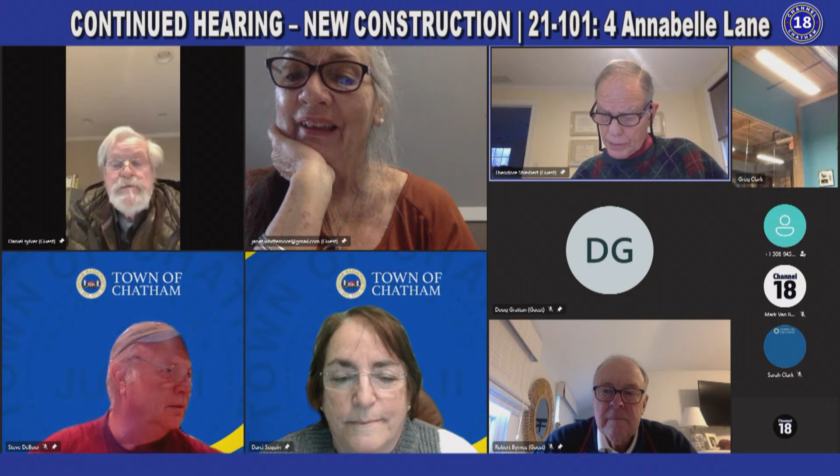So what has transpired since our last meeting? Wait a minute, let me just see the agenda. Continued hearing, new construction, 21-101, Chatham Productions LLC, care of Victoria Clark. Application to construct a new dwelling located at Lot 4, Annabelle Lane.

All righty, okay, go right ahead. So obviously this is a continuation of the Lot 4 application for new construction. The presentation we submitted, which I believe you all have copies of after the walkthrough yesterday that we handed out, specifically started to focus on the mass scale, et cetera, of the immediate surroundings, unlike previous meetings where we focused on other subdivisions that are in the HBDC as well as general business. So this packet specifically pointed out the footprint to lot size ratio of a lot of the buildings in the immediate surroundings.

Something we wanted to point out was that the average footprint to lot size ratio for all the ones we included is about 22%, versus what we're proposing on lot 4, which is a little less than 14%, because the lot size is 15,480 square feet and the footprint of the building is 2,104 square feet. So 22 versus 14 is a substantial difference.

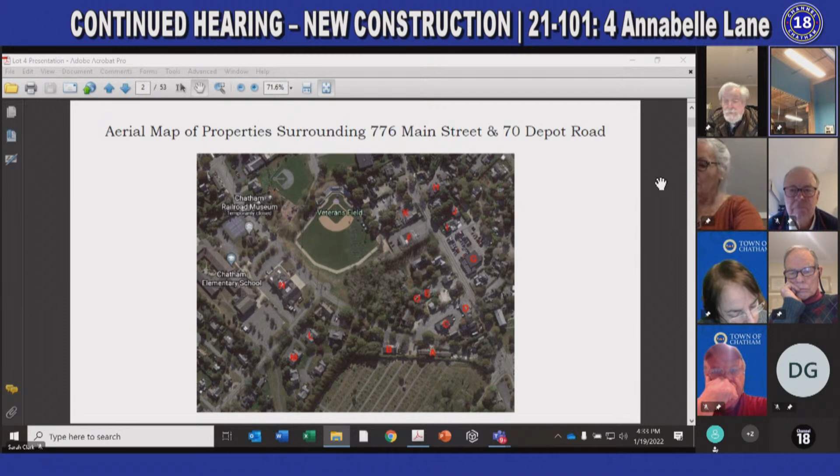One thing we also wanted to point out is that, although it hasn't gone through planning for building permit approval yet, 784 Main Street, which was voted on and approved by the HBDC, I believe 4-1, has a footprint to lot size ratio of a little under 18%, give or take. That property has a building footprint of over 3,000 square feet.

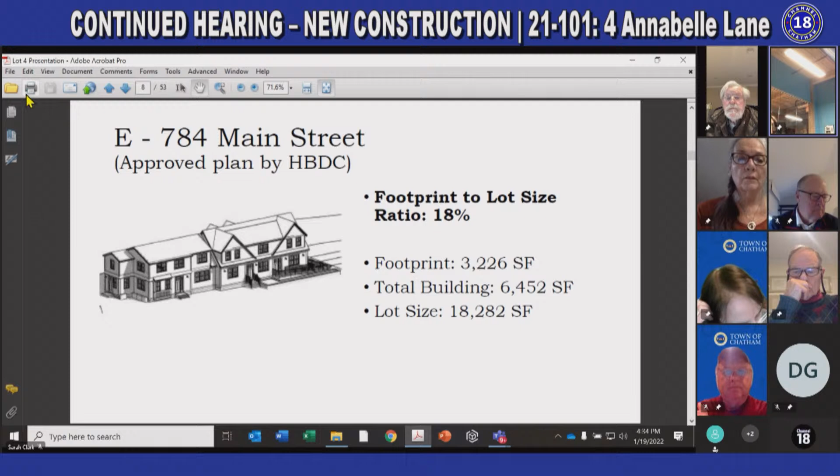Another thing regarding lot 4, we realized today, after our walkthrough yesterday, that the second floor on the plans we provided last meeting is actually smaller than shown, about 150 square feet smaller. So instead of being a 3,990 square foot house, it's actually about 3,800 square feet, give or take, which is a difference of about 150 square feet that we wanted to point out.

Additionally, regarding the conversation we had yesterday about the turnaround for the parking, to our understanding of the zoning bylaw guidelines, you're required to have 2 parking spaces for a residential dwelling unit, so I do not believe the parking turnaround is a requirement.

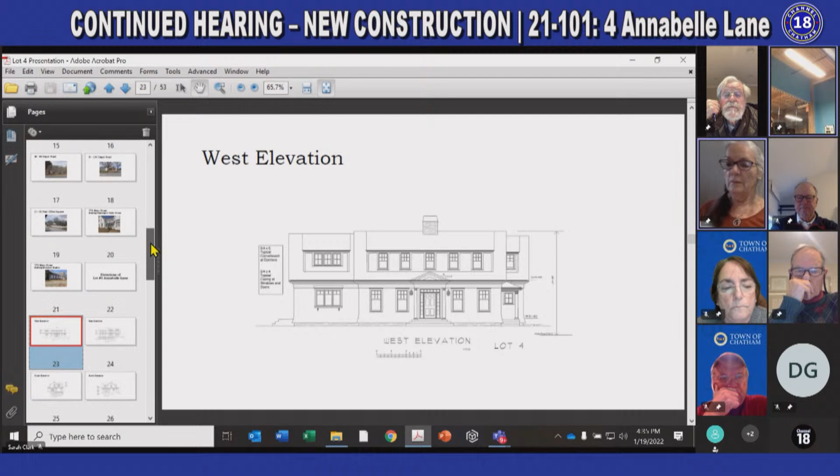We also looked at possibly adjusting it so that instead of going right up close to the property line, we'd make it shorter, not a full parking space but just a few feet of turnaround space, or putting it more along the side of the garage so it's further from the property line but still provides space to turn around. That's something we wanted to note based on our conversation at the walkthrough.

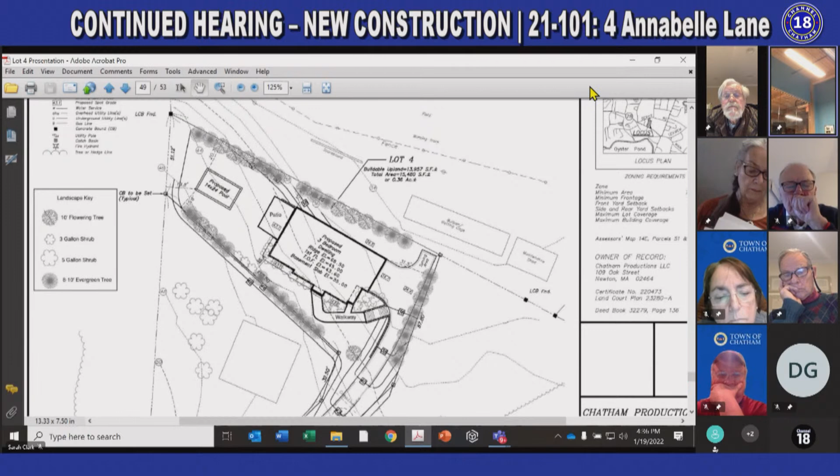Another thing we wanted to point out was the question about lot 4's house in relation to the property line at the ball field. The building is skewed to the property line. We said it was 15 feet, and if you look at this drawing, it's labeled 15'4" just off the patio, but the other end is 18'4", so the part closer to the batting cage area is actually 18'4" off that property line.

We may be able to skew that and turn it a little further. I wasn't able to reach David Clark to confirm it, but we may be able to angle it further forward away from the ball field to get it closer to 20 feet. We can't confirm that yet, but right now it shows 18'4".

Okay. Thank you very much.

So, I'm referring to the original floor plans from the original application, which stated the house was 3,984 square feet. We were looking at the floor plans today and realized Mark Zebrat had made a miscalculation on the second floor, including the dormers, which are part of the roof line, as part of the square footage. So there was a slight error, and the second floor is not 1,880 square feet, it's 1,730, a difference of 150 square feet. So the living space is 150 square feet less than what Mark had shown on those plans.

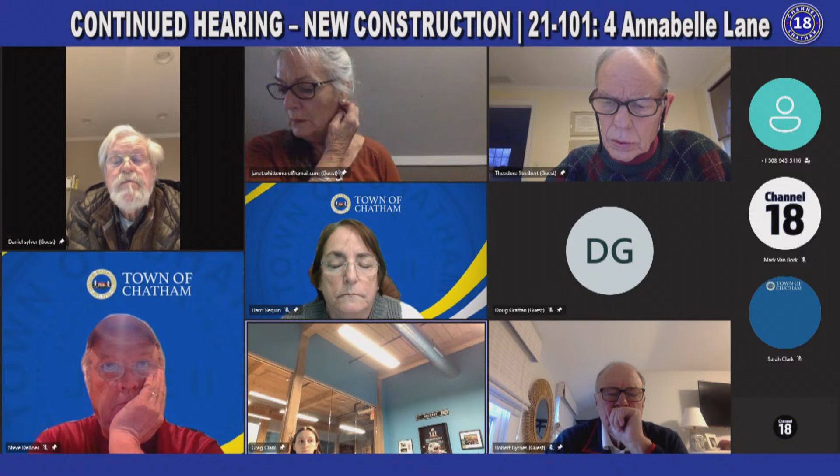I don't see how that's going to be. What kind of floor does the dormer have? The dormer doesn't go all the way out, Sam. The roof line, the way Mark has it drawn, if you look at the elevations, if Sarah can pull up those elevations or the floor plans.

I have them right here. You have one big shed dormer. You walk out in that shed dormer, don't you? Yes, so that portion you can walk to is included in the square footage. But the dormer doesn't go all the way out to the exterior wall of the floor below. No, of course, Mark had calculated... Mark's calculations for when he gave those numbers were carrying it out to the floor below, Sam. That's where he made the mistake.

Okay, that makes sense. Now I'm understanding. He just did the outside to outside on both floors. That was his error. Okay.

Okay, so let's go down the list. Let's start with Darci. Darci?

Yes, you're muted. Okay, first of all, I'd like to say thank you for the presentation and the site visit yesterday. It was very good that we were able to do that. I don't know if you want me to comment on the whole structure, or where would you like to start, Dan?

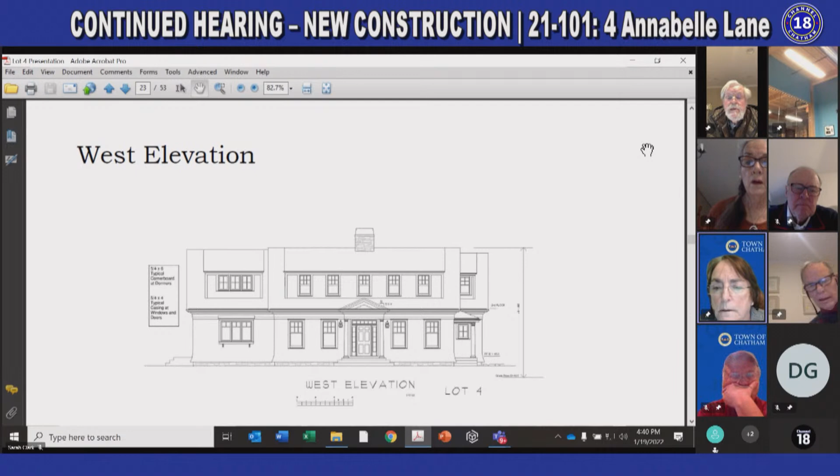Start anywhere you want, but let the conversation go where it's going. Okay. I'm okay with the building. I just wanted to point out that the planning board is the one who's going to be reviewing the parking areas. We have jurisdiction over everything else, the driveways, the paving, and the walkways. But as far as the parking, I'm not sure that's in our jurisdiction, so everybody should think about that when everything comes into play.

Yeah, we can ask Sarah. The HBDC has jurisdiction over hardscape, but I'm not sure that includes the parking area, Darci. So for a commercial structure, the planning board would have authority over it. Because this is proposed to be a residential structure, the HBDC would have review of the hardscape materials, and the zoning board would look at the setbacks to the parking areas. Right. That's the only comment I have right now. Let's see where the conversation goes. Thank you, Darci. Welcome. All right, Bob?

Let me unmute. Sarah, question: do we have purview over the placement of the home on the lot? Partially. You couldn't make them propose something that would be non-conforming as to the setbacks of our zoning bylaw. They're required to be 25 feet from the roadway, or the approved roadway, and 15 feet from any abutting property.

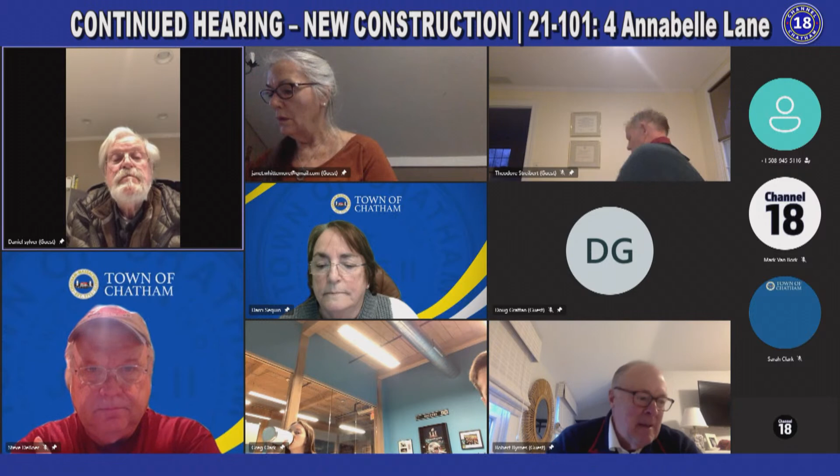I think you're making good progress overall on the site plan, including discussions on the theater, which I think are encouraging. Yesterday you talked a little bit, not too much, about the theater. Don't go too far into the theater, Bob. Yeah, no, I can't. So let me move on to lot 4.

I still have concerns about the size and how close the home will be to Veterans Field, especially to left field, where the majority of home run balls are hit in that ballpark. Without seeing the home placement on lot 3—and I maybe should not be talking about lot 3—but I believe it could be workable with Veterans Field. A few suggestions on getting back to lot 4.

After looking at the topography plan, and I looked at it last night a couple of times, my wife thought I was crazy. She said, 'What are you looking at this thing so much for?' So my thoughts are, my suggestion: would it be possible to reconfigure lots 4 and 5 so the lot 4 home could be moved up the hill, away from the ball field, in the vicinity—not directly on, but in the vicinity—of where the proposed pool is, leaving more room for open green space behind the batting cage and scoreboard. The rear of the house, is it possible to have that caddy corner?

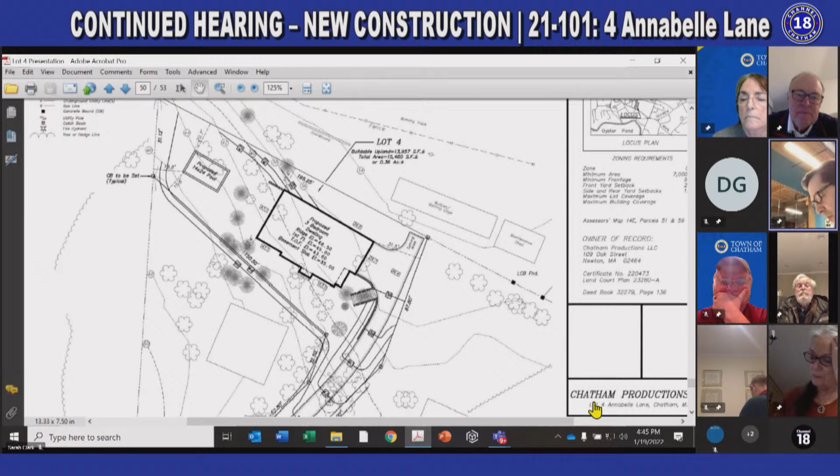I'll give the applicant an opportunity to respond if you'd like. Sure. So just in regards to that, I believe when we were going through the preliminary plan with planning board, Greg Clark went through those scenarios, Bob, about seeing if we could take that panhandle lot and somehow make it bigger.

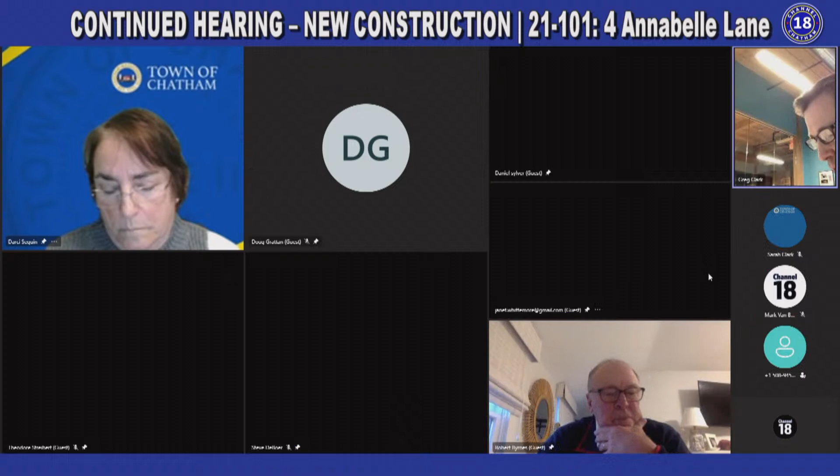But he for some reason could not do it. I'm not sure what the requirements were. I believe it had to do with the size of the road, like the length and the cul-de-sac, because I know...

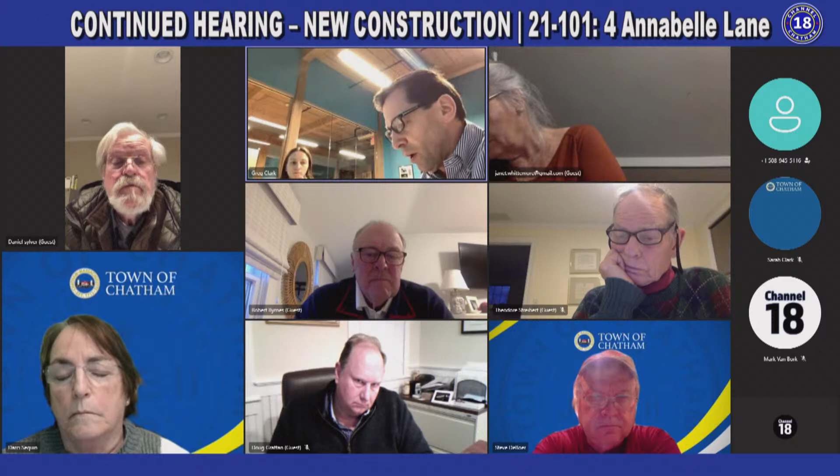And if they wanted to continue that further down, we would clear some of the scrub that is immediately behind the scoreboard. It's not as dense, but once you get past the scoreboard where the town hadn't cleared at all, it comes out quite a bit, as we saw from the property line.

Yeah. We wouldn't have a problem, but we'd have to work with a landscape architect, obviously, to determine the trees that we would put behind the scoreboard.

Would they get enough sun to grow, or would they be crowded in the next few years and die? But we're amenable to doing that, planting them, irrigating them, putting a fence up between them, maintaining them until we got to a certain point that they were growing on their own. So that's something that we would propose to provide a little bit of visual enclosure between the batting cage area and anyone sitting in the stands looking out left field in these properties.

Okay. Would you supply irrigation? We would, yes.

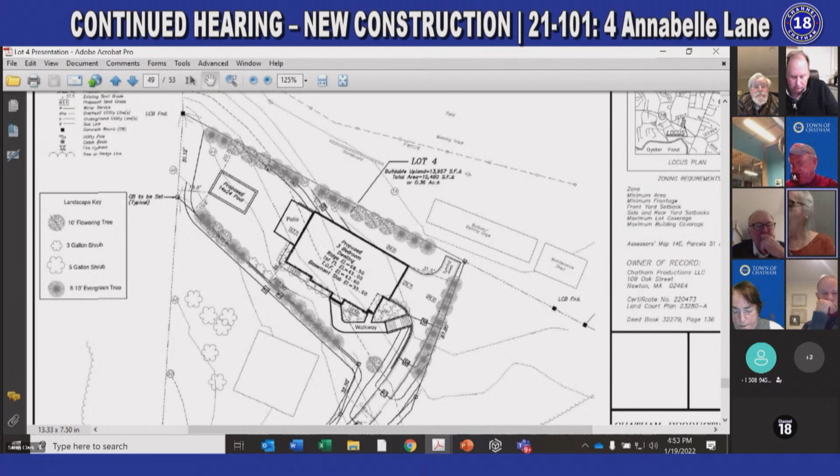All right, thank you, Steve. Janet? Yeah, to the Clarks, I have a question. Are you there? Yes. Hello. Can you help me understand the buildings that you had chosen to represent yourselves here?

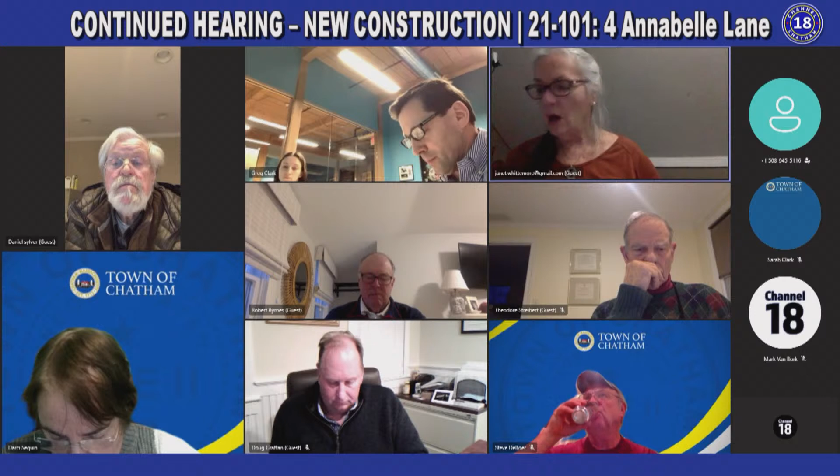Are many of them condominiums? Most of them are business. There are a total of 10 buildings. You have no private homes to indicate the size of the houses in the immediate area. But what you've done is you've very carefully documented 67 Depot Road, which is the fish store, and the post office square, which is multiple businesses in that area. And then you've chosen the post office of all kinds of things.

I don't know. By the way, the post office rents that, and whomever the owner is doesn't take care of it. I'm going to skip E because that's not even built yet. And then 752 Main Street, that houses the liquor store and the laundromat, which will be company to these people who are going to have their house. I hope they don't complain about our neighborhood.

And then G is 781 Main Street, which is the Ford dealership. And then the next one that's set as an example, you just give two numbers there, I guess it's 731 through 737. And that is a condominium complex that has 6 units in it. Also 759, I believe, is part of a condominium plot there. I think that this fellow may own the buildings in back that have been formally condominiumized.

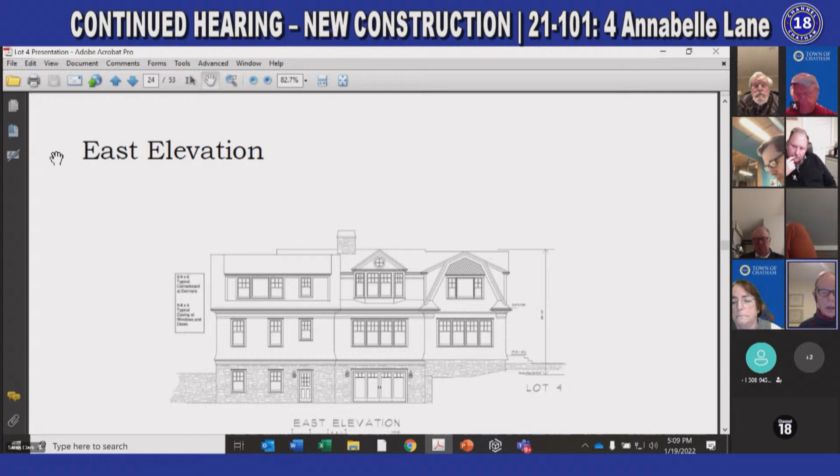And I realize the other part is the garage, so that's okay. But anyway, that's my feeling—even though it's not part of any zoning calculation necessarily, it certainly contributes to the mass. And I think the position on the lot could be simplified if some of these rooms were made more realistic for the whole building. To have a study, which is going to be deemed a bedroom, I'm sure you know that, at 23 feet, and the bedrooms upstairs all exceeding 20 feet in... Sarah?

Jan, the board doesn't have purview over interior spaces. I know it's affecting the massing, Jan, but you have to remember you don't have purview over the uses of the interior spaces. I recognize that, but my comment about the dimension affects the overall width of the building, and the overall width affects the height and the overall massing of the whole building. So I'm pointing out that one of our objections about the buildings being too big is due to the exorbitant room size. That's my point. Thank you, Jan.

Yes, Janet? Were you the person with your hand up? I noticed - do we have sewer on Depot Road? Are these buildings going to be sewered? They all have their own septic system. It is designed with sewer. So we have sewer up on Depot Road. Yes. Thank you.

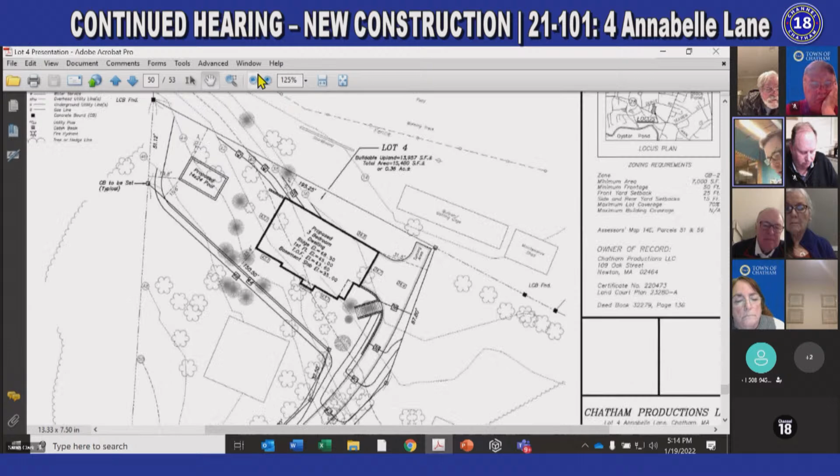Yeah, I don't think he can steal from 5 because he'd have to give up some of the road, and then he wouldn't meet the dimensions on the width of the road with the clearance he needs. So when I look at the road, the dimension is 25.68 feet on the radius there - we'd have to take some of that to give to lot 5, to take some of the end you're talking about up in the corner. I know what you're saying, but I think that was David's problem with that. Yeah, it's a challenge to get 4 homes in there.

It's a real challenge, and you've got to keep - I really want to see some more open space behind the batting cage and the scoreboard. I think it's just very close. So again, those are consistent with my previous comments. Thanks. Thank you, Robert.

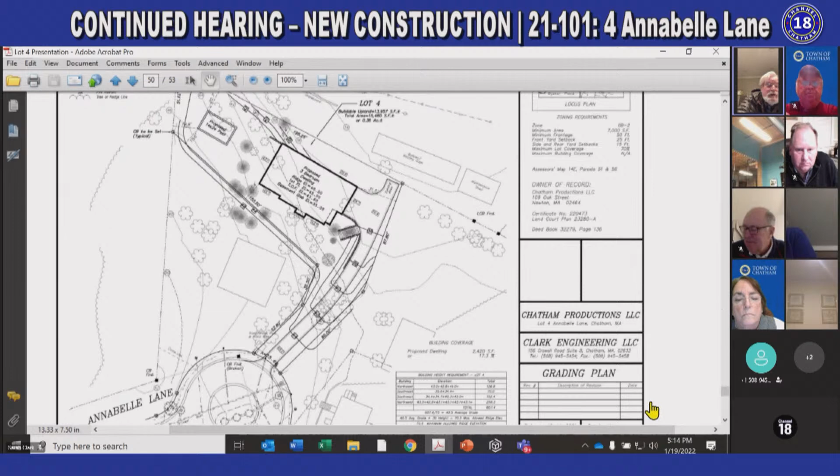Does anybody else have any comments or questions? Do you want to make a motion, Dan? You can try making one, Doug. I will try to make a motion. I think it's going to have to be conditioned. Okay, well, I'm going to make a motion, Dan, and we'll go from there. Hold on, let Bob make the last comment. Bob, go ahead. I thought Dan wanted to make a comment. No, I'm all set. I thought he did. Okay, thanks.

Thank you, Bob. Doug Grattan will make a motion for continuing the hearing on new construction 21-101, Chatham Productions LLC, care of Victoria Clark, application to construct a new dwelling located at Lot 4, Annabelle Lane, as presented, with the addition that landscaping, trees will be planted along with a fence, and the trees will be irrigated by the developer. Dawn Sequin will second the motion.

Okay, I have a suggestion. I think we can just condition it that the applicant come back with a landscaping plan and corrected numbers for the square footage. So far we do have something that was sent to us, but we haven't got anything officially filed. Sarah, is that changed square footage in the files? I do have it, I printed out Victoria's email and added it to the file. Okay, but it's not reflected on the plans as of yet. So I think they should come back with those final documents for the square footage, and I want to see the new percentages represented on the plans as far as building coverage is concerned.

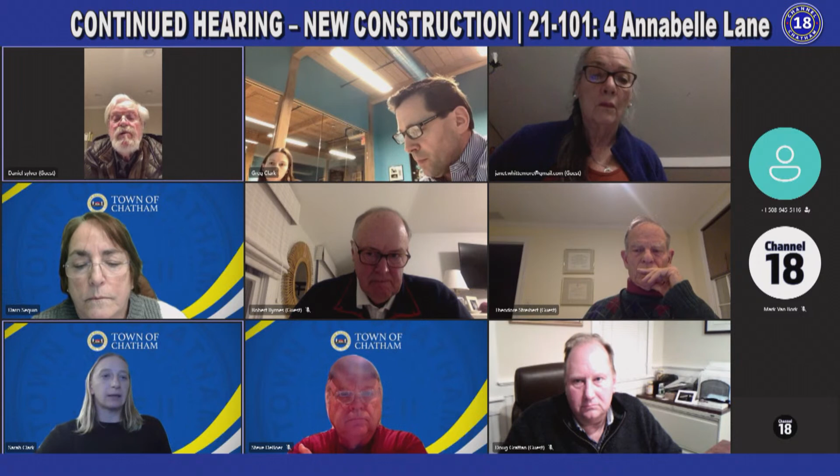Well, all of that has been provided in the packet that they gave you for this time. If you'd like, we could have them go through some of those details as to the stone walls, the lighting fixtures that are proposed, because all of those are included in the packet. Okay, I was trying to make the meeting shorter, but if you folks want to go through that, I'm more than happy to stay.

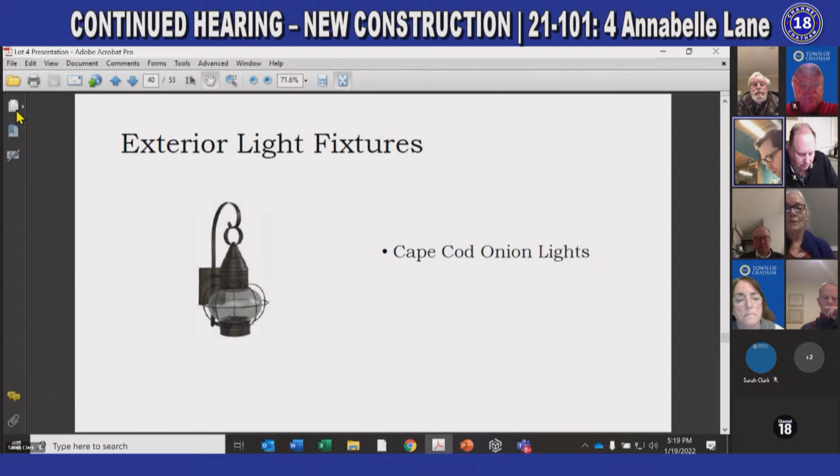Alright, so let's start with the lighting. That's easy, I see onion lights all around. So the lighting, yes, this is the proposal to have onion lights at the exterior lighting, and Mark Zebrat has on his drawings the locations where those are proposed currently. If you look at the four elevations, you'll see those. I believe it's the front door, the back garage door, the side door, as well as the two doors.

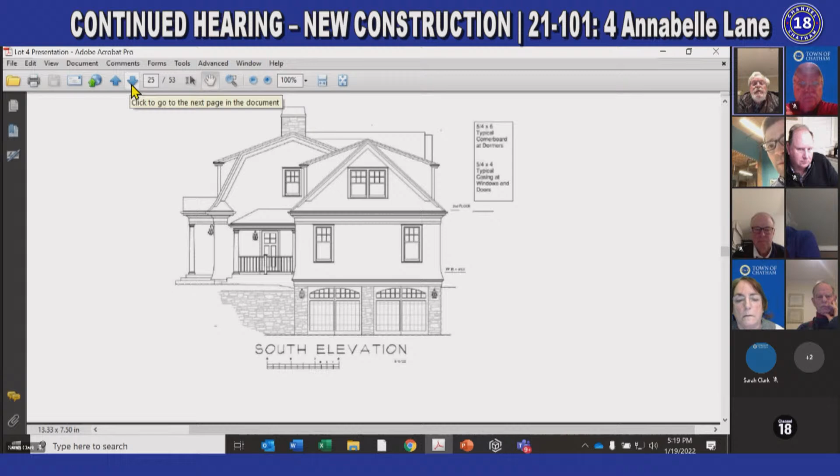Alright, now I'm gonna throw a wrench in the works. Do we have any spot lighting for the pool, lighting for the stairs, lighting for the walkways? No, that would all have to come back to you under a full landscaping plan. After the home is approved, then the landscape architect will design the lighting he plans to put on walkways and whatnot. So right now we're just talking about the lights directly around the doors required by code, right? Correct, yes.

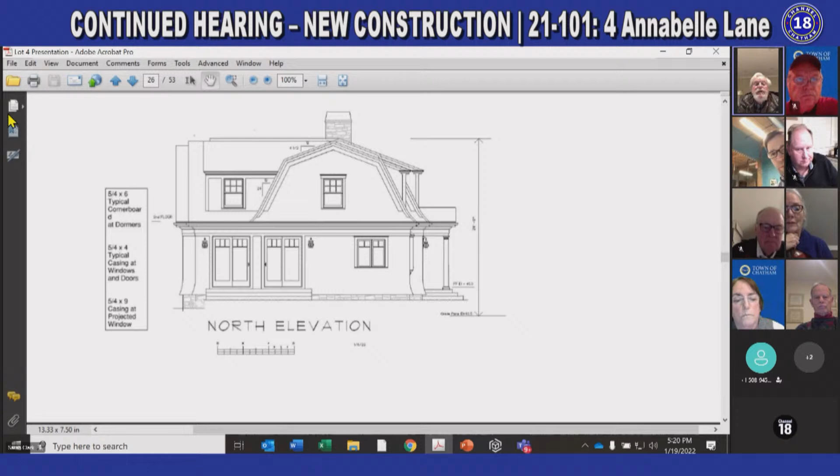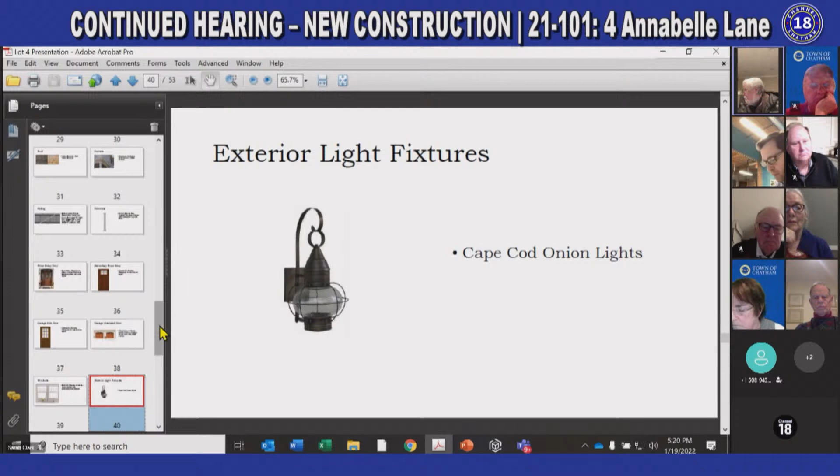Very good. Does anybody on the commission have any comments? I think the onion lights are quite straightforward. Anybody? No? Alright, now how about the hardscaping materials? We've got all kinds of things here. So where would you like to go, Greg? Actually, why don't we back up, what are you proposing for siding?

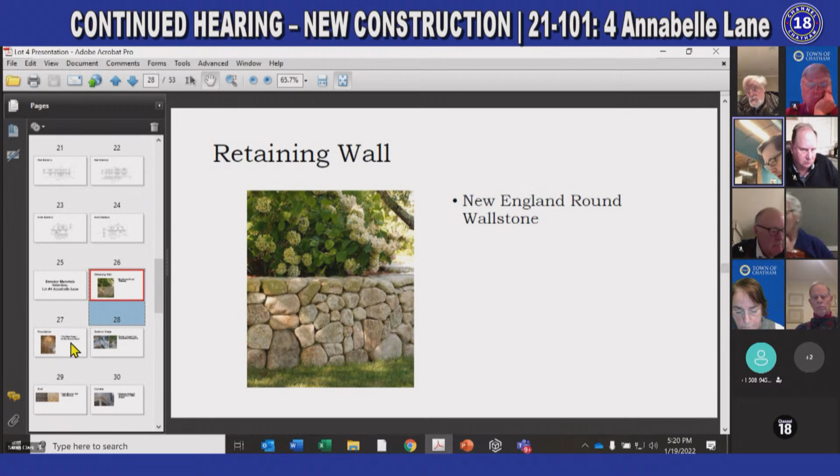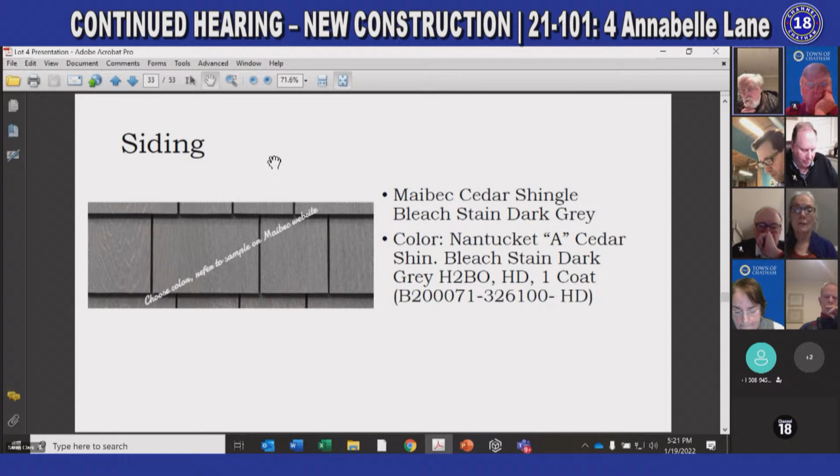I know, let's see, you had red cedar shingles. Those are on the roof. Okay, very good, I see 2.

I have a quick question. Is that a composite shingle, or a regular wood shingle? No, that's a brand name, a manufacturer. They're wood, a natural cedar, a very good grade of sidewall shingles.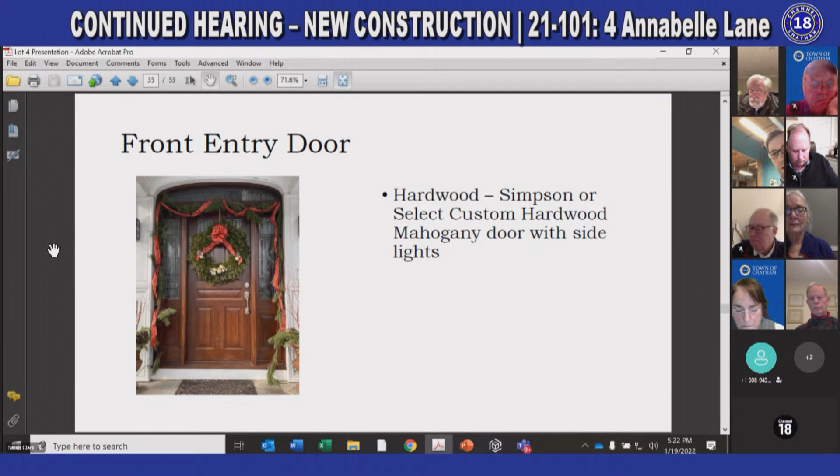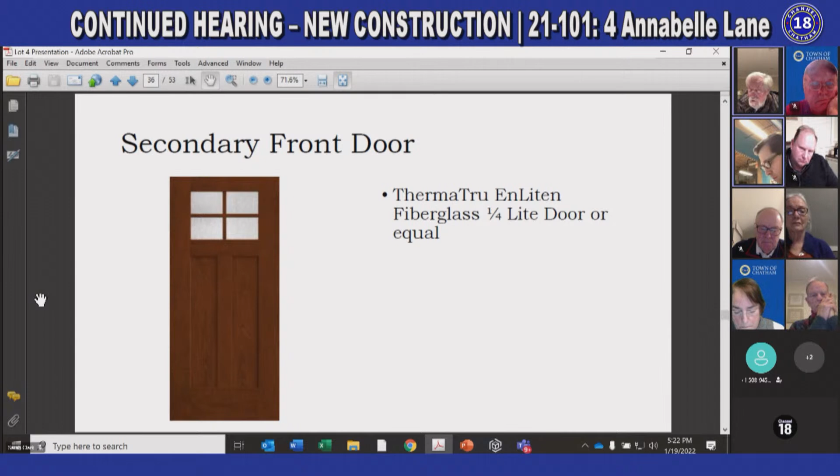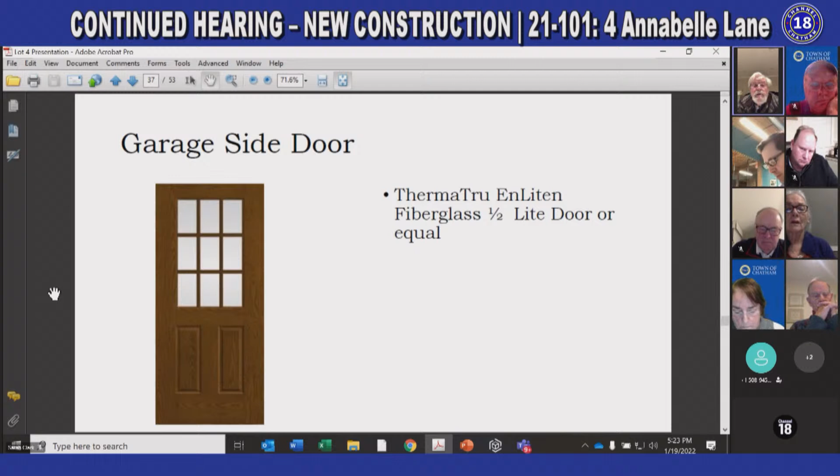Then you have the secondary front door, to the right of the main entrance, which is a Therma-Tru fiberglass door. It looks like wood, but it's fiberglass. And then the garage side entrance door, on the back of the property, again looks like a wood door, but it's a true fiberglass insulated door.

I see you have aluminum gutters all around. Yes, aluminum gutters and downspouts, and we're anticipating that when the design gets going on the civil, we'll incorporate taking that water to on-site underground structures that will disperse the water, so nothing runs off to the properties.

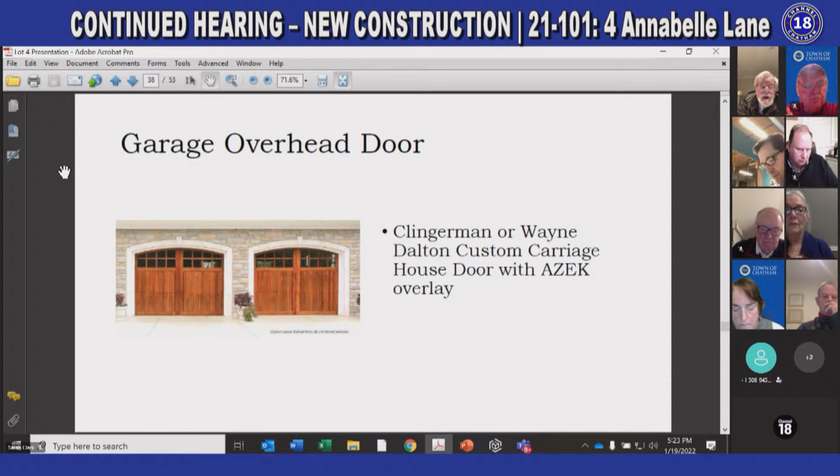And then these are your overhead doors. These will be clad with AZEK so that they're maintenance free. Okay, I'm going to switch over to the windows now, they're Marvin, right?

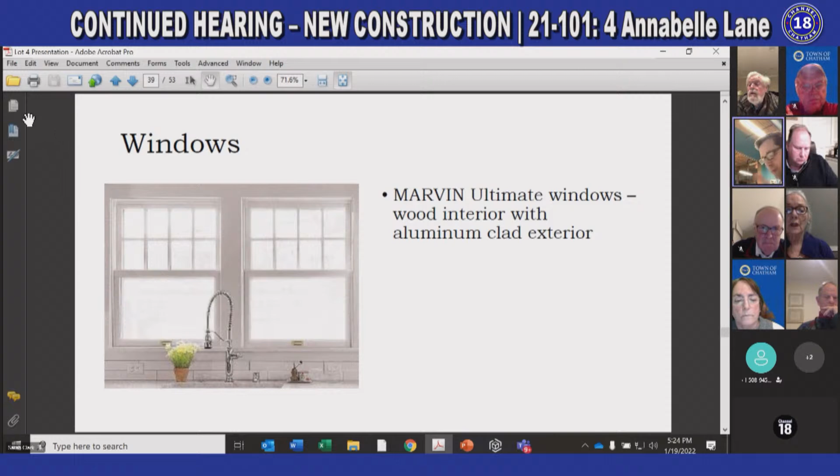Does anybody want to comment on the glazing, the size of the glazing? They look to be 8 over 1. I don't know if that's representative, you have to look at the elevations to get the different divisions. That's just an example of a Marvin window, but these are the true light divisions.

Does anybody have any question about the glazing? No? All right, now I'm going to go on to the trim. That's going to be represented on Mark's drawing. The windows are going to have probably 1 by 5 trim.

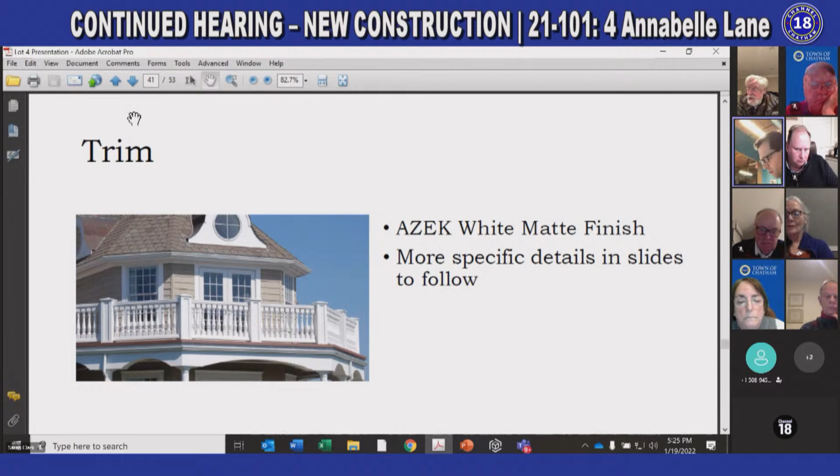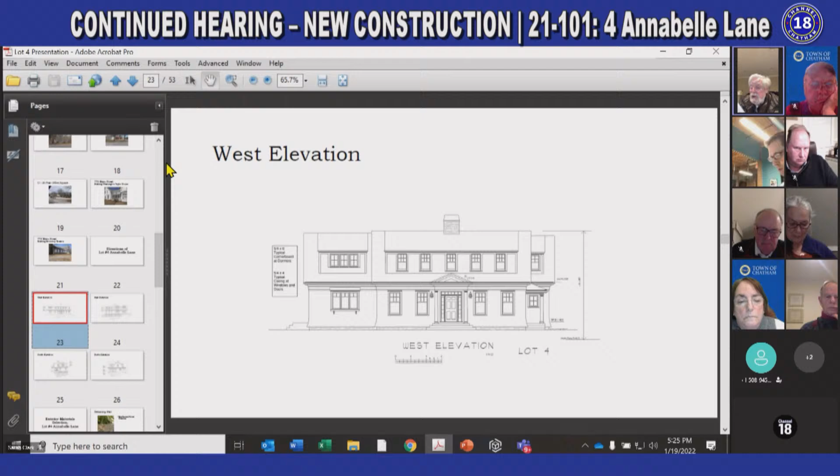And historic sills. We propose to use 5 quarter stock on that. I think it's 5 quarter by... I'm missing that drawing, the elevations, it was too small for me to read. He had quite a bit of detail on the gutter and the flares and whatnot. So it's 5 quarter by 4 at the window casings and the door casings.

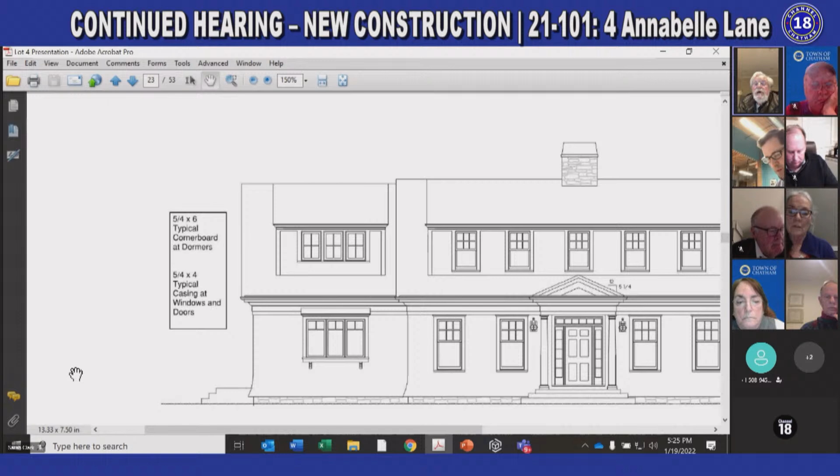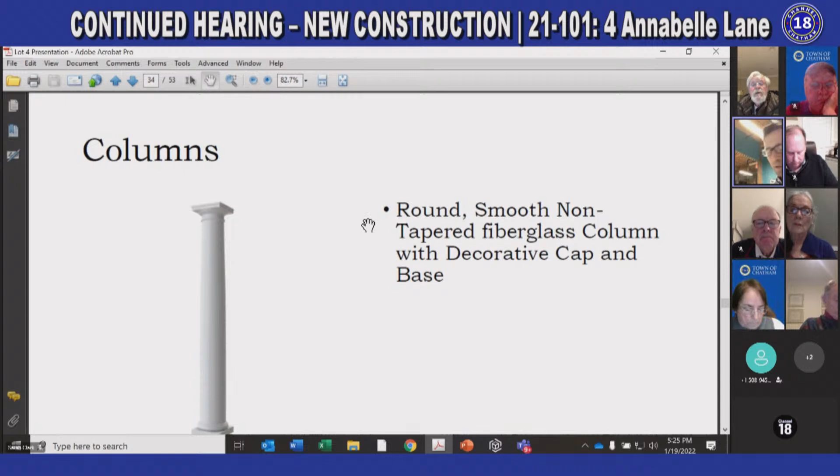5 quarter by 6 corner boards at the dormers. And then he also gives you the columns specified. Yes, those are also fiberglass, structural fiberglass columns, so they won't decay with the weather. Okay, so that pretty much takes care of the wood, unless someone has another question.

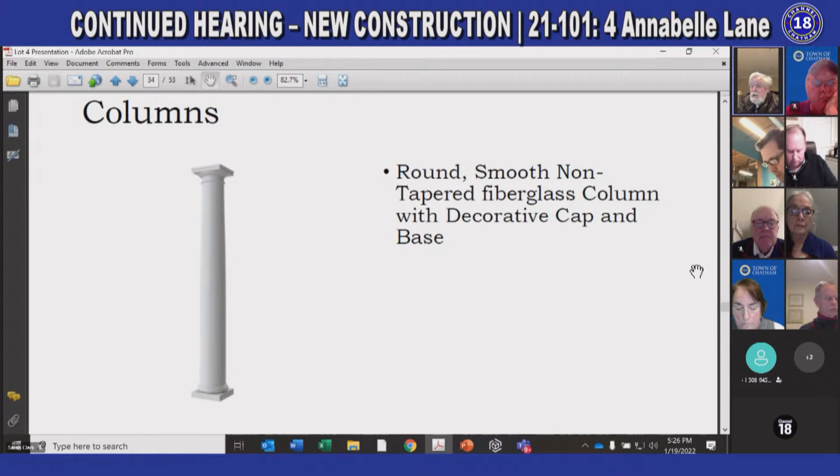All right, let's go on to some of the hardscaping. We've got a step. Yes, so the steps will be solid granite steps. Color proposed is Concord gray, which is one of the standards you see.

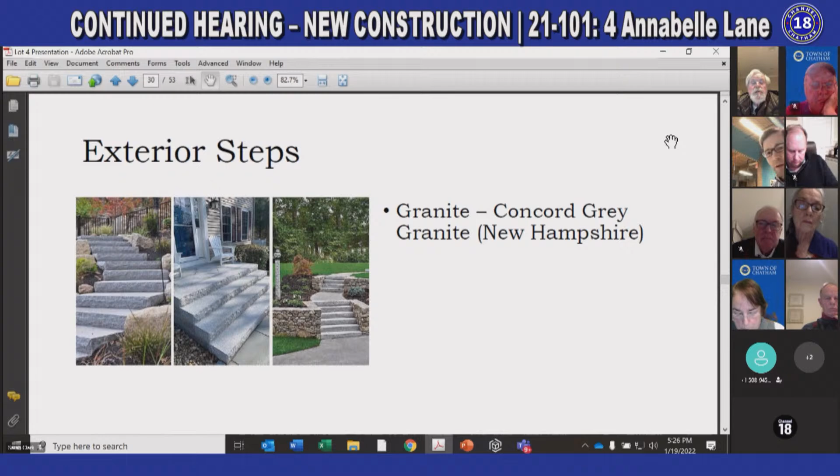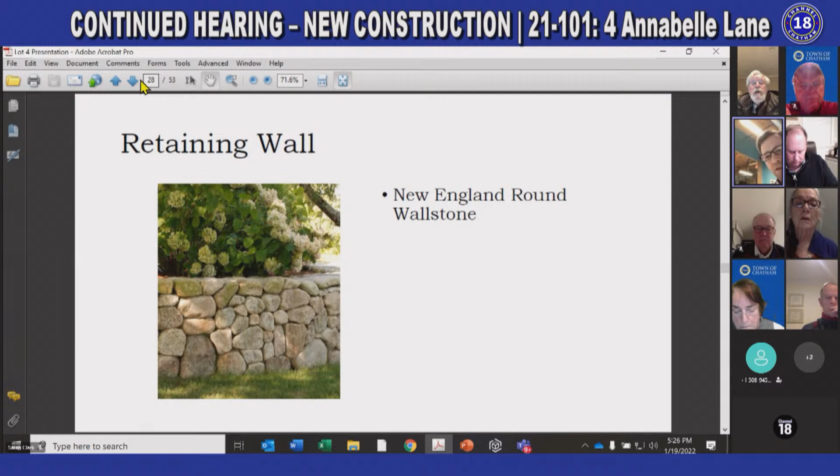And you have 2 walls, the garden wall and a small retaining wall. So you have the freestanding walls, the retaining wall on site. The solid stone walls will be New England round wall stone, and then the veneer over the foundation where it's exposed will be thin stone veneer, similar stone, matching in color and shape, but it's a 1 inch thick veneer that you apply.

Any questions, anybody? No? All right, and we're taking the swimming pool separately, right? Yes, a different application. Correct. Okay, and we'll also be taking the lights, landscaping lights, along with the landscaping plans, right? Yes.

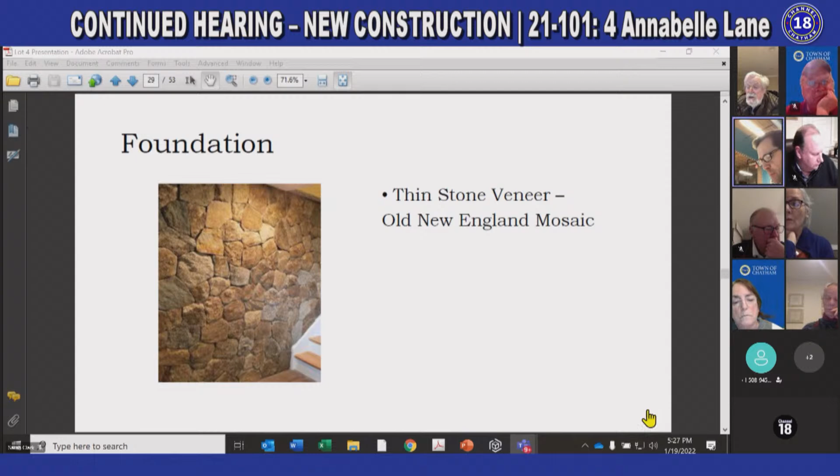Who has jurisdiction over the driveway material and the turnaround, planning board or us, or both? In this case it would be the H.B.D.C., because they do not need site plan approval from the planning board. Alright, anybody have any comments about the driveways and turnarounds?

No? I would, yes, I'd like to comment. I think some product that would be chosen would be a light color that doesn't absorb the heat.

Again, I'm thinking about global warming.

They make several things. They've got a nice bluestone that they impregnate into the tar. I don't know, I guess we can talk to them about that later, unless someone wants to define that tonight.

Over on Nantucket they have a lot of shell driveways, but they're very difficult to plow. They're beautiful, but difficult to plow. Does anybody want to add any other materials? I'm not sure I hit everything, but that's usually what we get.

So that leads us back to Darcy, where I said we have conditioned this such that he comes back with a separate landscaping plan. Is that all right, Darcy? Yes, so Doug can amend his motion.

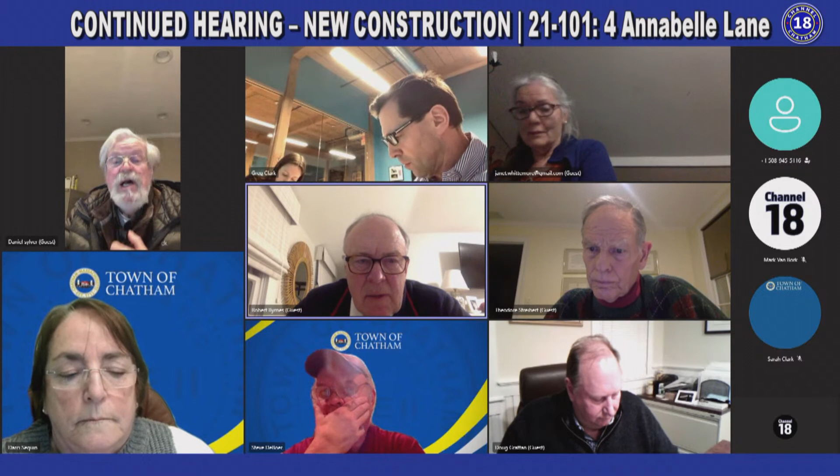What are we voting on, a continuation? No, we're voting to approve the plans as they are for the building and that the applicant come back with the landscaping plans.

I vote no. You want to abstain? He said no, I said no. Oh, I'm sorry, I thought you said you didn't know. No. Okay, no, okay.

Doug Grattan votes to approve. And let's see, Steve DuBois.

I guess if I were voting, I would. What would you do, Steve? I'm sorry, I forgot to. No, what would you do? I understand. If I were voting, I would vote to approve.

Janet Whittemore, I have no vote. What would you do if you did have a vote, Janet? Well, if I had a vote, I'm definitely against the size of these buildings, and I hold to that. All right, well, I am going to abstain.

So this is Dan Silver. I too think that they could be smaller, but he's worked very well, Greg.

That has no reflection on you, I'm just concerned about the overall size of the project. So did a good job, everybody did a good job to get to this point. We'll see in the future.